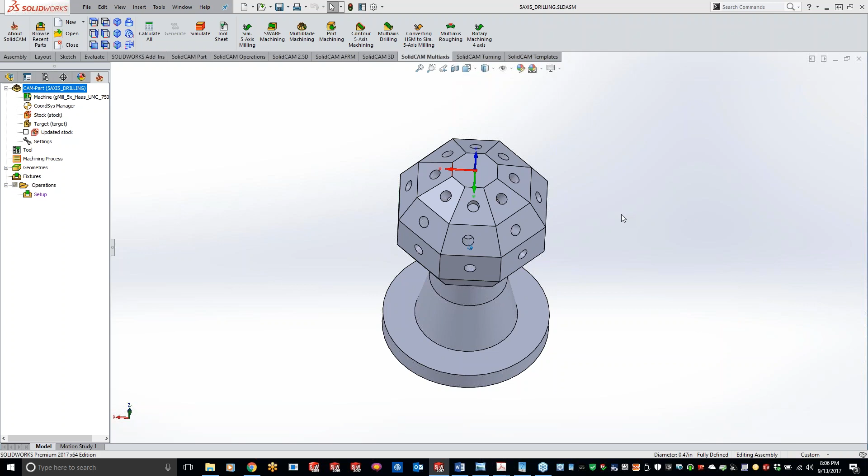Perfect, that kind of answers my question. I was curious about that, but the 5-axis drilling is going to make things very easy to use, since we don't have to create a coordinate system on each one of these hole planes. Especially when we get into our next part, some of these holes are at angles, and there's a compound angle on top of that. But it's very easy to use.

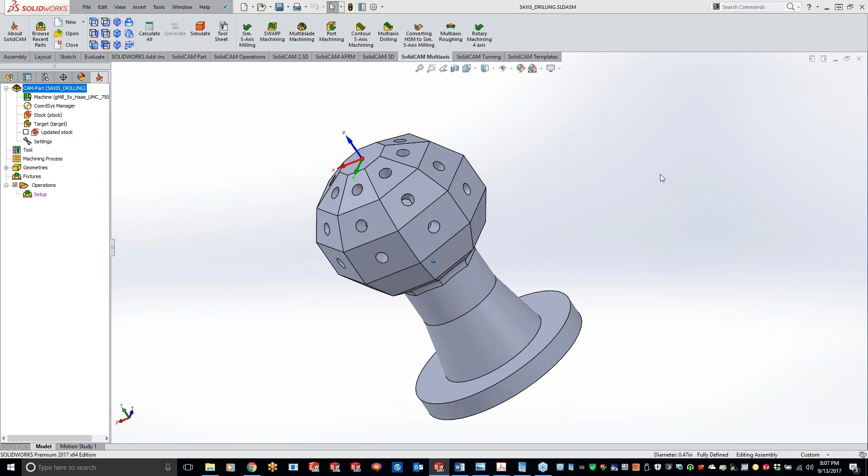So we've got this little sphere part here, holes all the way around it. What we're going to do is just our regular multi-axis drilling. We only have one option up here, and it's set up just like what I've been going through with the simultaneous 5-axis, just a little bit different on the drill geometry.

So we have a couple different ways of grabbing your drill geometry. We can easily pick a hole and click find holes, and it's going to find all my holes that are that size. If I get rid of this, I can use a filter, and let's say I just want a specific diameter hole. I can hit the check box for hole diameter, highlight the from or the to, and just click on the outside perimeter, and it will auto-populate those numbers for us. So a real nice feature there.

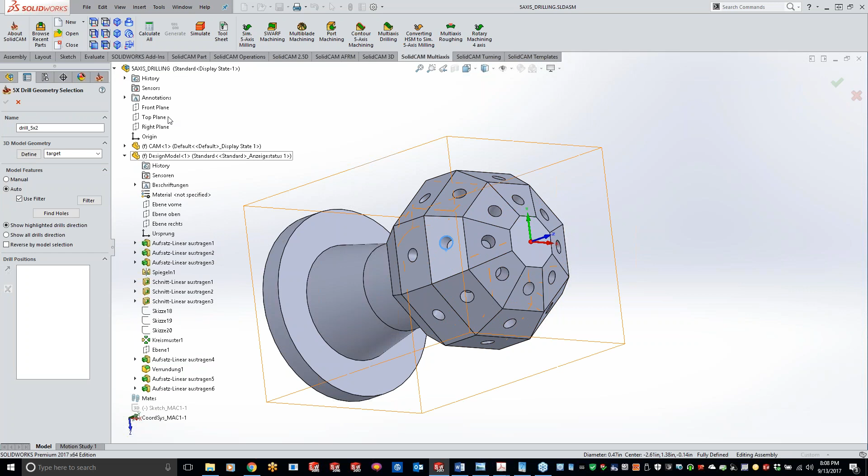And then we can filter out hole height. If you guys have your holes in different colors, we can do that too. A lot of cool stuff in here if we just want to do blind holes or through holes, filtering out stuff if you've got a lot of different size hole parts. Another way of going about it is you can grab from your feature tree also. So a lot of different ways of grabbing your holes, completely up to how you guys want to do it, but I'm just going to click find holes.

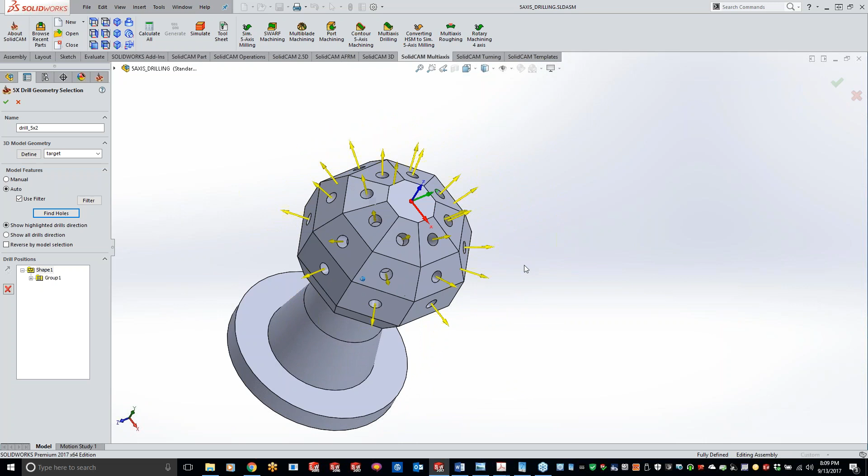Now, one thing with the 5-axis is you want to make sure your arrows are pointing out. This will indicate which way the 5-axis head needs to be rotated to achieve that hole direction. So you'll see I have all my arrows pointing out. Looks good, simple as that, grabbing the geometry.

Next up, grab our tool. So we can come in here and just grab my drill bit. It's really easy, just like drilling. Levels, where do you want your safety and retract levels? I'm just going to leave this as default right here.

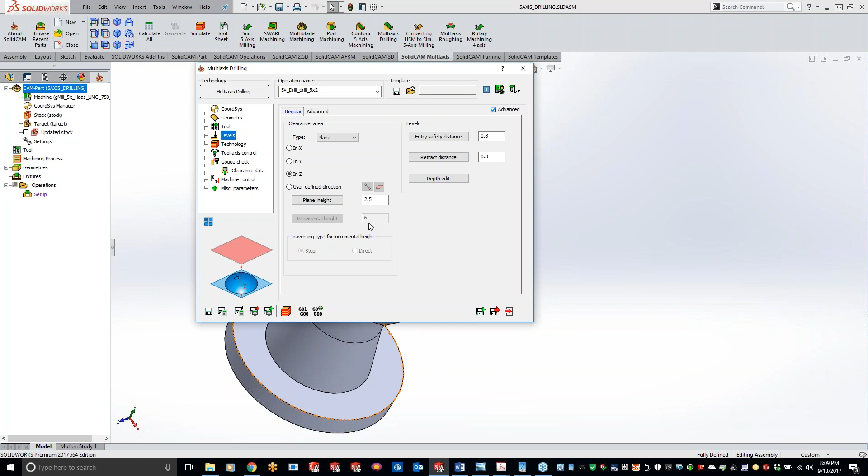Now if I want to come in here and change up my depth, you'll see everything's kind of grayed out. Don't get discouraged by that. All you have to do is hit the plus button, and then everything comes alive for us. So maybe if we want to do a spot drill, we could put our whole drill depth at 0 and do our diameter value. If we're cutting, I think it was a 4, I can't remember what size hole. If we wanted to do a .5-inch, so we have a little bit of chamfer on there, we could put that value in there.

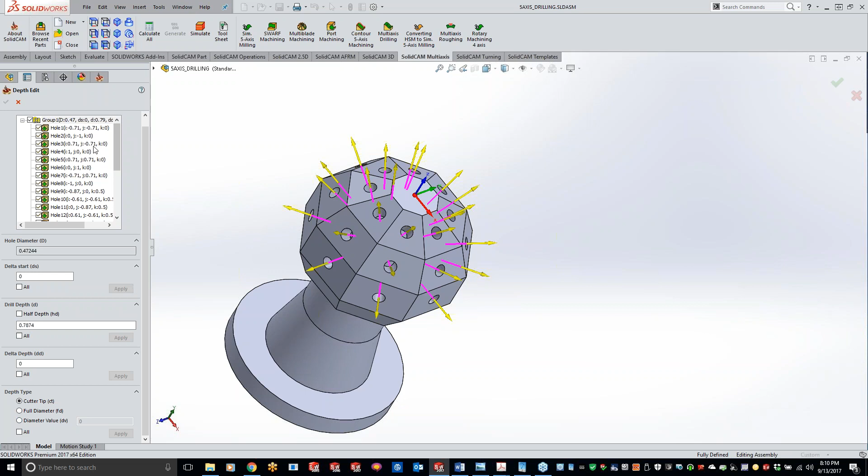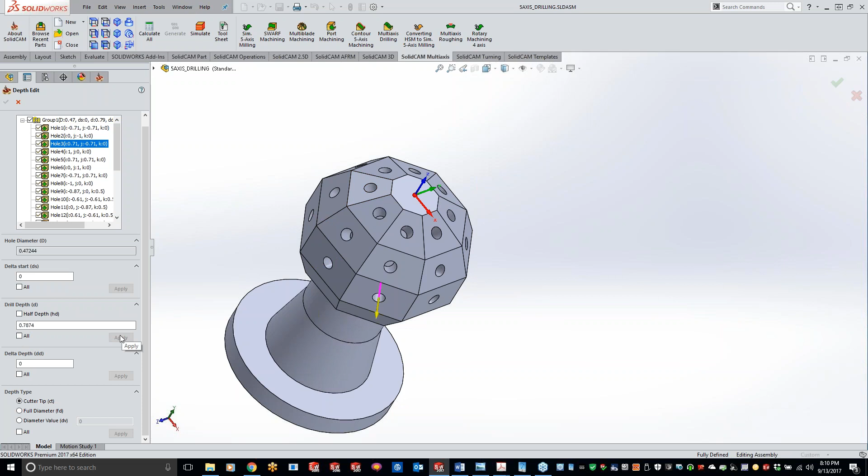Now you can sort these out so each hole is its own. So if I wanted to do maybe this one a little bit deeper depth, I can do that. But what it's pulling these numbers from is the actual model itself, so you really shouldn't have to do a lot of messing around here. But if there is that scenario where you need to go a little bit deeper or shallower, you can do individual holes, or we can put that number, hit the check box for all, then apply, and it will apply that depth to all the holes in this group.

So, the technology section is how do you want to drill out your hole? Do you want to do a G81, G82, G83? You guys can use this for tapping and peck tapping. Also, if you want to bore out a hole.

But for this particular one, we can just do a G83, and we can just do a step down of, let's do 0.5 here, and we can do a Q peck.

Now, one thing sometimes gets a little confusing, and I can't remember if I talked about this when we went over the drilling, but your step down right here, it all depends on your post processor. Some posts are set up so you can just put the step down value in here, and it's going to automatically add that to your Q peck. Your step down value right here is just for simulation only, I guess you could say. But in some cases, it will affect your post too. So it just depends on how they built your post.

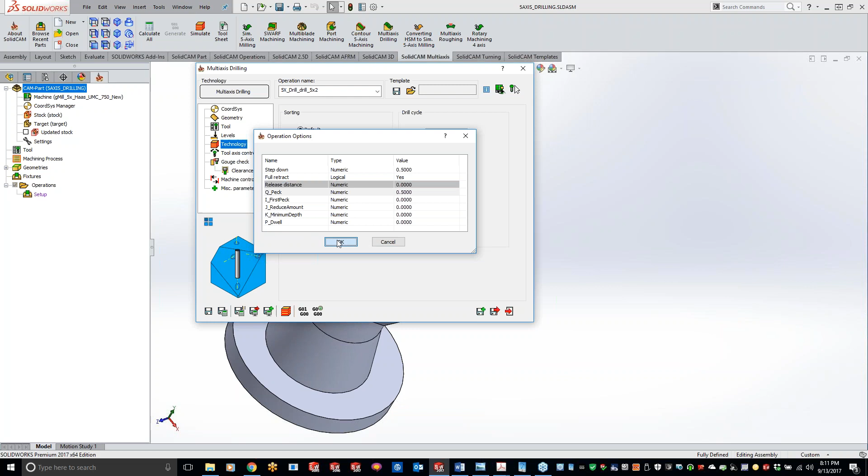So we'll just do a 0.5 for our Q peck here. And just like our regular drilling that we've covered before, you can do a first peck, reduce amount, dwells, and all that good stuff here. But that is it. Very simple, easy to use.

Right here you have your sorting, just like in drilling. So you can sort it out however you want. We're kind of starting on the side and working our way around, getting all those bottom holes going all the way around, and then we kind of move up and keep doing a spiral pattern.

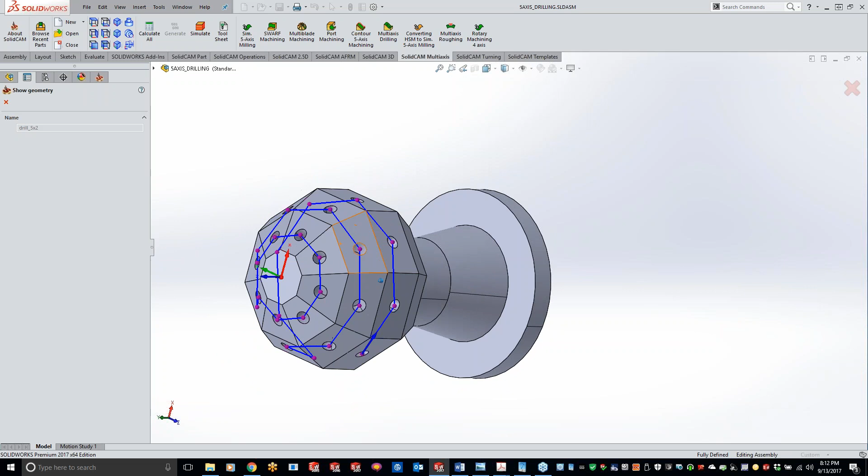Now, if you guys wanted to change that up, we can do a shortest distance. We could even do it advanced and hit the little button right here, and we can change up our pattern however you guys want. I know we've kind of covered a lot of this already in the drilling, but a little bit of a review for you guys.

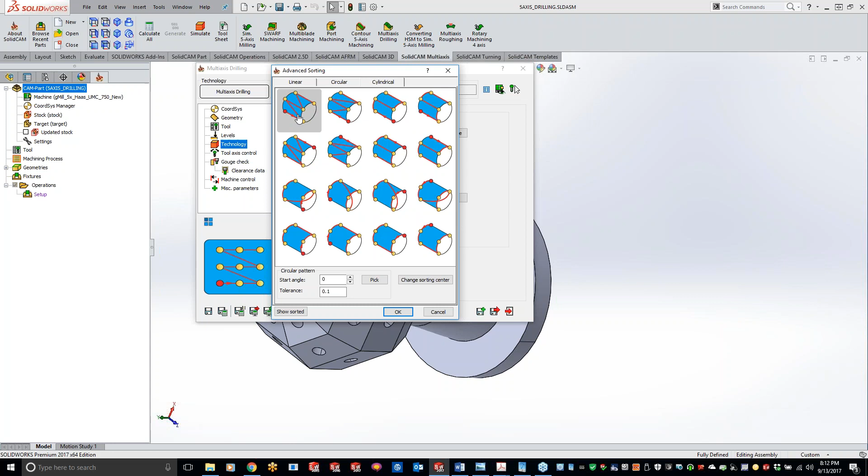So definitely a lot of different options here. You can do cylindrical here and go up and down instead of going sideways. Couple cool options there for you guys.

Tool axis control, pretty easy. Do you want a 4-axis output or 5-axis output? For this one, we're definitely going to need 5-axis just because of the way the head's rotating around with these angles here. So not a lot going on right here.

For those of you guys that don't have a 5-axis and want to make your life a lot easier programming drilling holes for the 4th axis and don't want to put those coordinate systems on there, definitely just come down to your 4-axis and call her good.

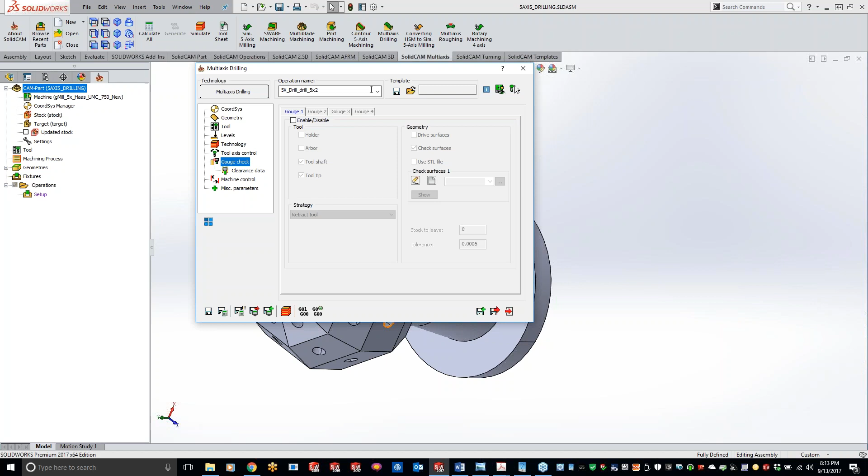And then gouge check. If we want to do a gouge check, basically against a holder is kind of what we're going for there. We're really not going to have to worry about gouging because it's automatically pulling in the depth of the holes for us. It already tells us the diameter of the holes, so not a lot we really have to worry about with gouge checking, but that option is here for you guys also.

And then you got your clearance of your holder, and then machine controls like what we've had through pretty much every operation that we've gone through for you guys. So that being said, let's do save and calculate.

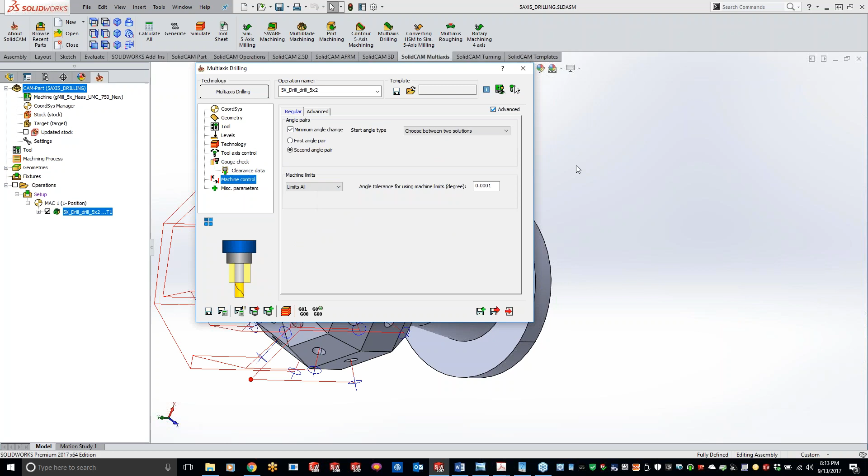And we have all our drill holes coming in here. So like I said, this is real simple, easy to use. If we want, let's go ahead and simulate this through. Do a solid verify first.

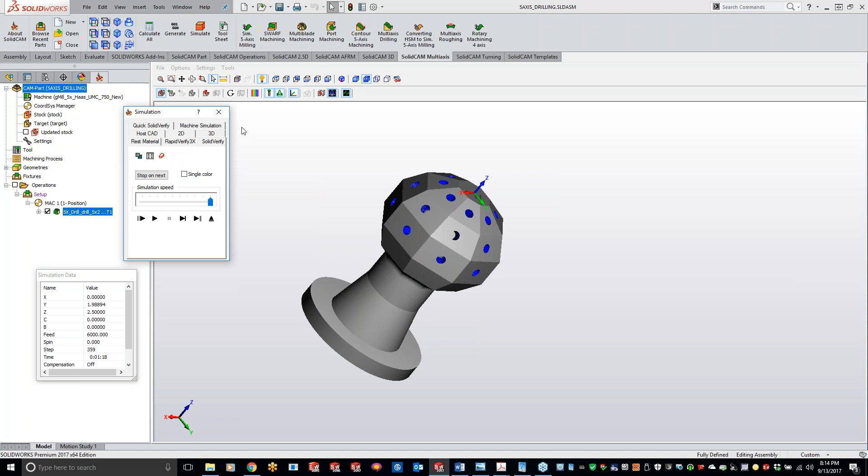Like I said, just going around and grabbing all those holes. It knows all the angles automatically for the hole location. So we don't have to worry about different angles. It all figures that out automatically for you guys.

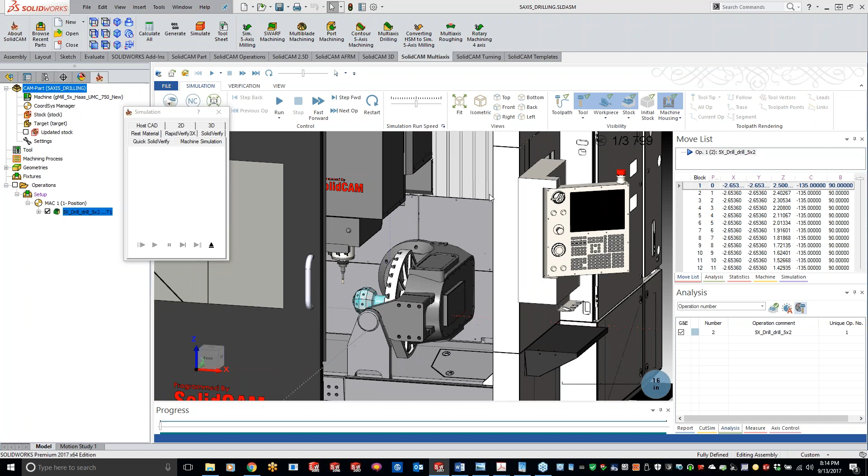If we throw this on the machine sim here, get this loaded up, get rid of our tool path. And I guess we want to see what it looks like with the shroud on, kind of with the machine shroud there. And we'll get that out of the way so we can kind of see what's going on here. Slow it down a little bit.

Doing our peck, just rotating around, working on the bottom. And then we'll see it kick up after this. I think it's this hole. Yep, right there.

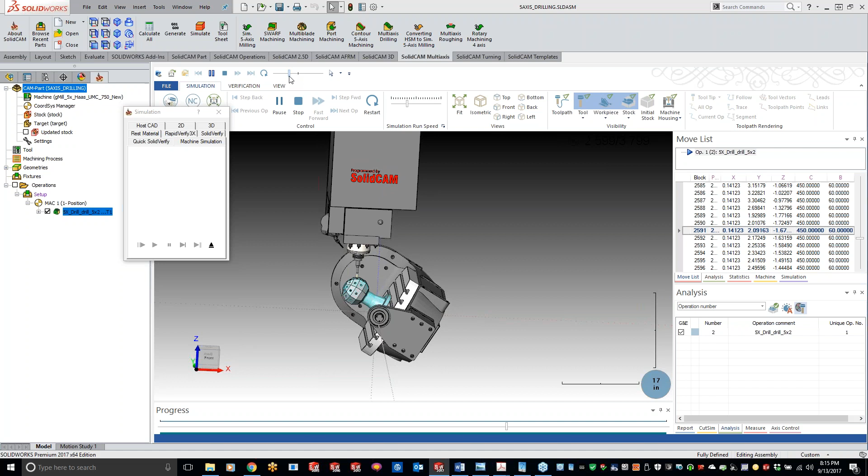And it takes out all the guesswork for you guys, so it makes it real nice and easy for doing any drilling on an oddball area, I guess you would say, if you guys are just doing a single hole or multiple different holes.

Speed it up a little bit here. There we go. So we have a finished off part there. Any questions, guys, on this part?

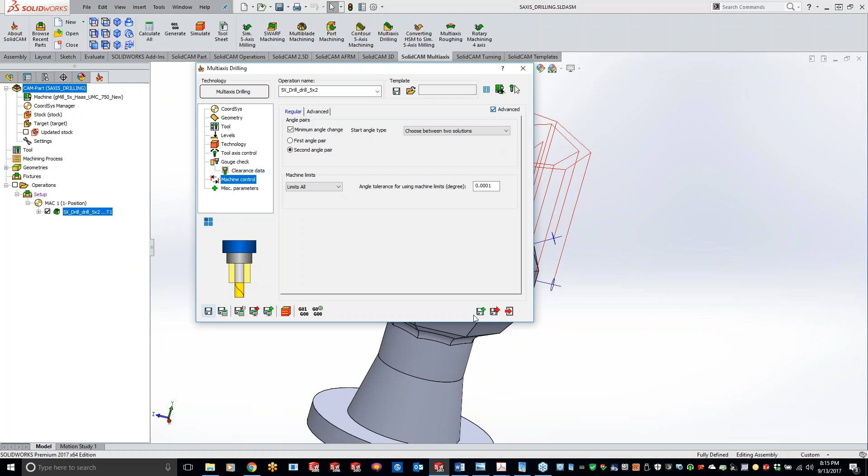The 5-axis drilling here. Tonight's class will be a little short just because the 5-axis drilling is so simple and easy, but let's go to our next part here.

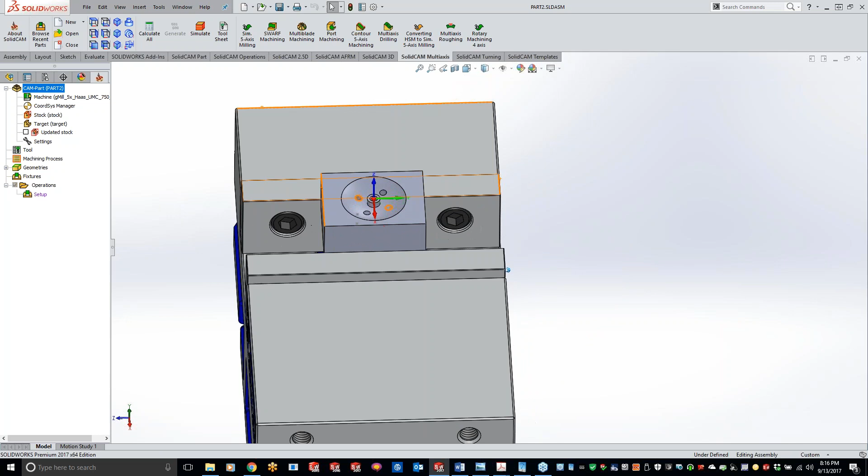So here's looks like a pretty simple part here, but if we actually kind of get down in there, like this hole right here, you can see it's kind of coming in at a very odd angle. Same thing with this hole right here, this hole right here. They're all kind of coming in at these goofy, funky angles.

So like I said before, instead of kind of coming in here, setting up your coordinate system to be aligned with that hole and trying to figure out where to probe it and all that good stuff, we'll let the software do all the hard work for us.

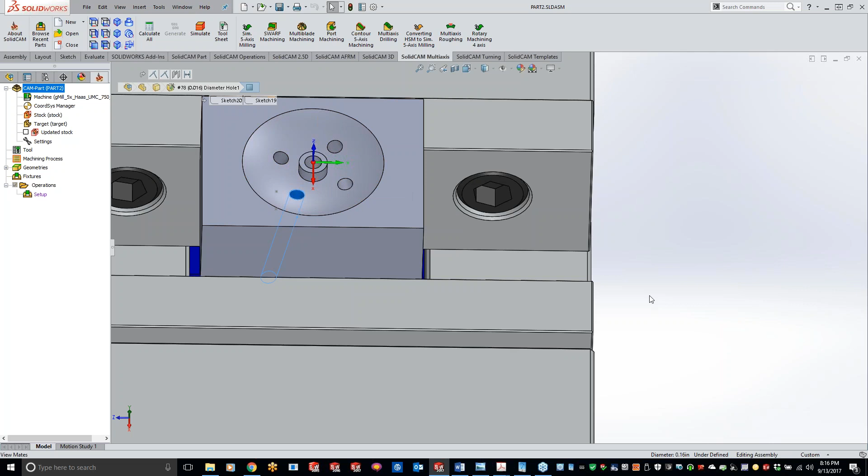I just noticed I have my coordinate system flipped all around here. My X should be going the other way, but that's all right. So once again, we can do our multi-axis drilling.

Go to geometry, and we'll just kind of zoom in on one hole, click find holes. I grabbed all of them. I don't want to do that center hole right there, so I can come over here and just remove that one from my group.

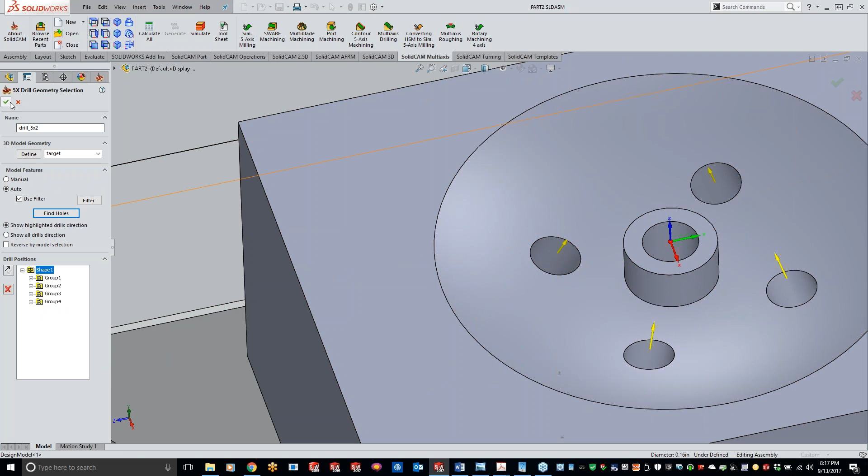So it's easy enough to swap them around. Go ahead and grab my drill bit here. And our levels. And we'll just kind of leave everything and see what we get here.

Technology, let's do another peck drilling here. And we'll just do 100th thou peck. And for correct G code, let's do 100th thou right there. Hit OK. Tool axis control, don't have to worry about it. Gouge check, don't have to worry about it. Save and calculate.

So now it's saying my clearance is too narrow. So let me get over to my levels. And let's just set this at 0.25.

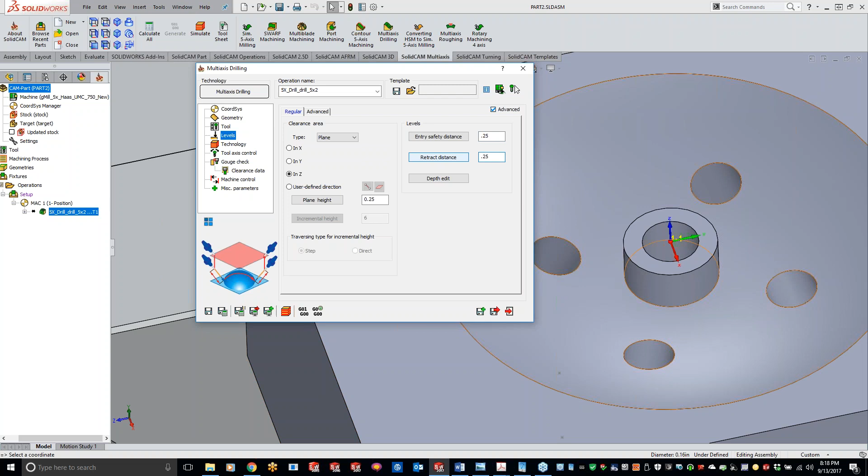All right, I got to, let's see, maybe let's move these all at 0.25 here. There we go. So I'm not sure why it was saying too narrow, because I put a smaller number in there. Instead of 800 thou, I put 250 thou in there. And that kind of was telling me that I couldn't get my angle that it was trying to achieve with that distance I put in there for some reason.

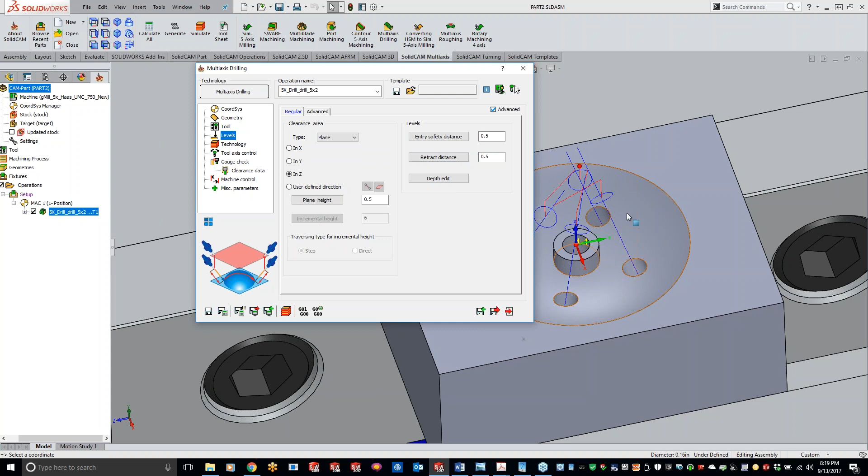So maybe, just out of curiosity, if we had this at 0.5, change that to 0.5. Maybe these numbers all have to be the same for everything to jive for the head to get rotated around here. This kind of rotated here, but yeah, that looks, everything looks good there.

I'm not sure why I got that error there for a second, but once again, if we needed to, we can come in here and modify our drill depth or go down to a certain diameter. But like I said, default is going to be down to the tip, going through that part for us.

And cover technology. Already saved and calculated. So let's go and do a SolidVerify here.

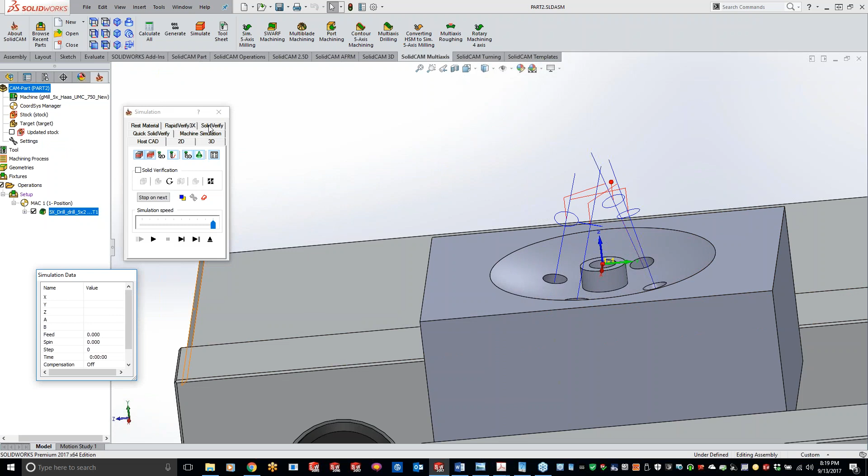So we're doing a little bit of air cutting right there. So what we can do is definitely shorten up that clearance and retreat distance, so we're not cutting any air there. So you can see our first about 3 pecks aren't hitting what's going on there.

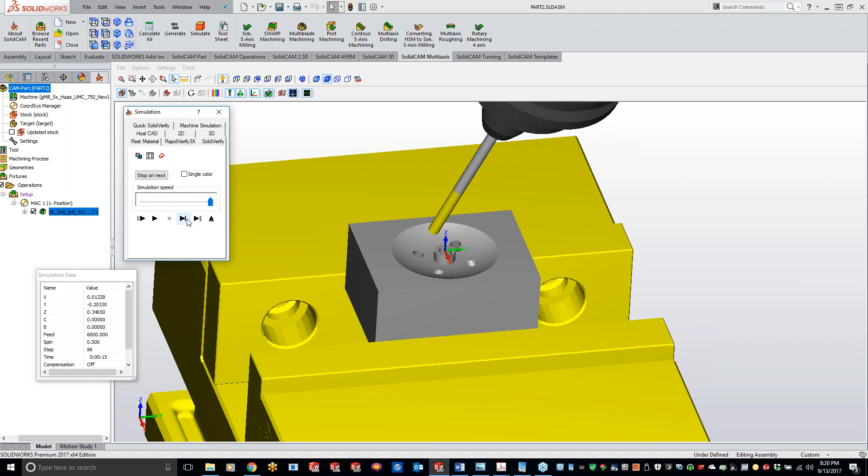So let's just kind of clean that up a little bit. Let's just put that back at 0.25, 0.25, 0.25 here. Bring everything down a little bit.

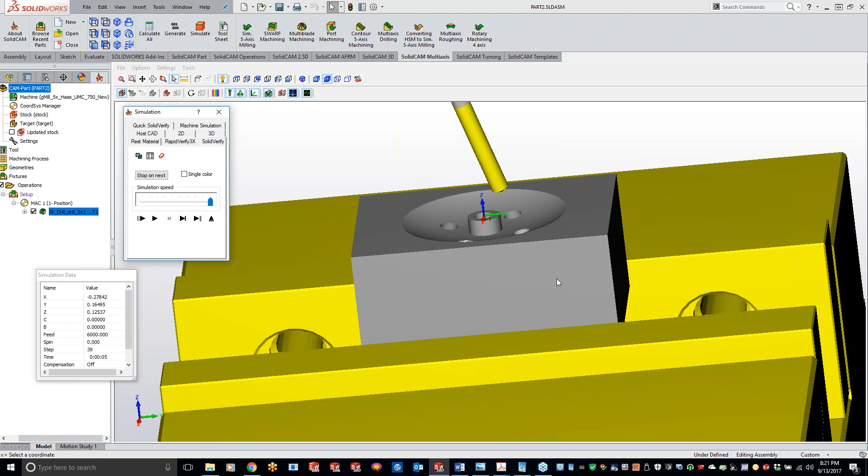Still doing a little bit of air cutting, but I don't dare bring that down too much further, just because when it goes to rotate the head around, I don't want that. It's already going to be a pinched butt cheek when that head's rotating around that close to that part there. So I'll savor the 2 extra air cuts there.

Let's see what she looks like in Machine Sim here.

And I know everybody on the meeting can testify to those little moments when you're on the machine.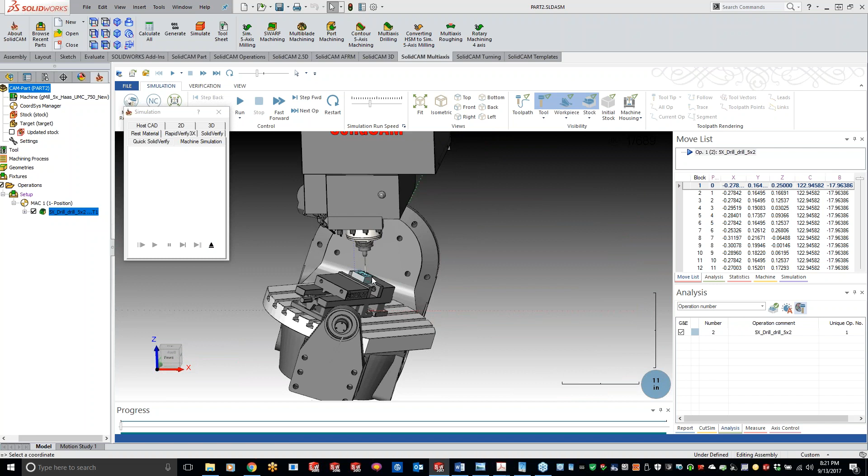All right, so you can see that we're kicked over on their side, and then we're also kicked over this way to get that angle in there. So if we just play this through here, rotating around, and voila, we got our holes.

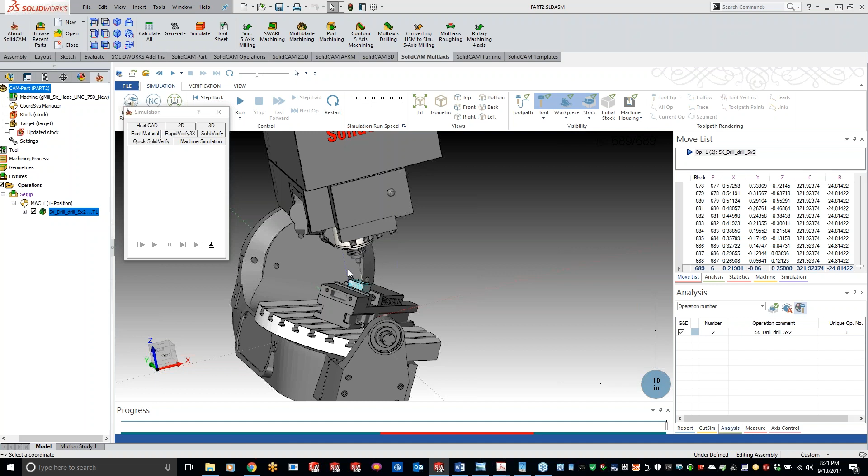Like I said, pretty simple, easy to use. Other than that retreat distance being, maybe a rule of thumb is try to keep these distances all the same for you guys. I'm not sure why, but I can definitely look into that. But other than that, like I said, it's basically drilling.

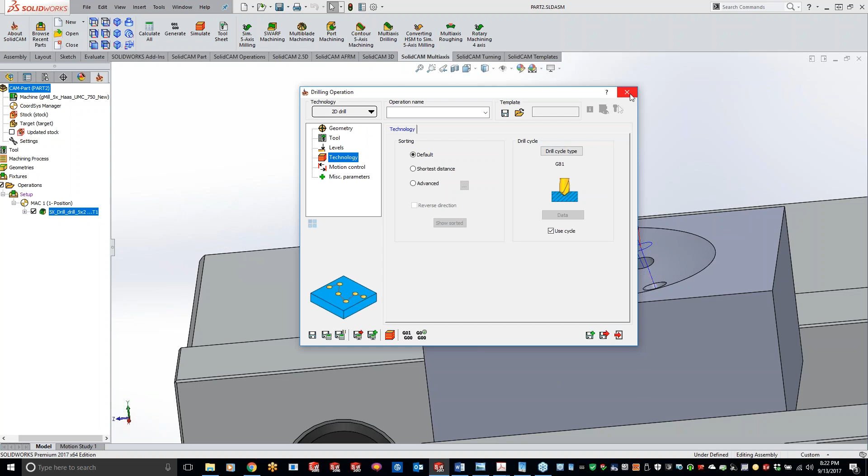If you were to come over here and just do a standard drilling operation, basically the same thing. You got your geometry, tools. Our levels look a little bit different, but pretty much the same thing. Still got your safety and clearance. Technology is going to look identical. The only thing that's different is when we get over to the tool axis control, if you want a 5-axis output or a 4-axis output.

And the other advantage is being able to do all the holes in multiple directions like that without having to set up all those coordinate systems. So yeah, you can do it all in 2D drilling, but with the swarf contour and drilling options enabled, you don't have to set up those coordinate systems. It's going to make your life a lot easier.

Just setting up the coordinate system isn't too bad for these compound angles. It's trying to get it to line up on your machine to probe that compound angle at that weird angle, finding your G54, I guess you'd say, or your G54.1 P1 - that's going to be the toughest part.

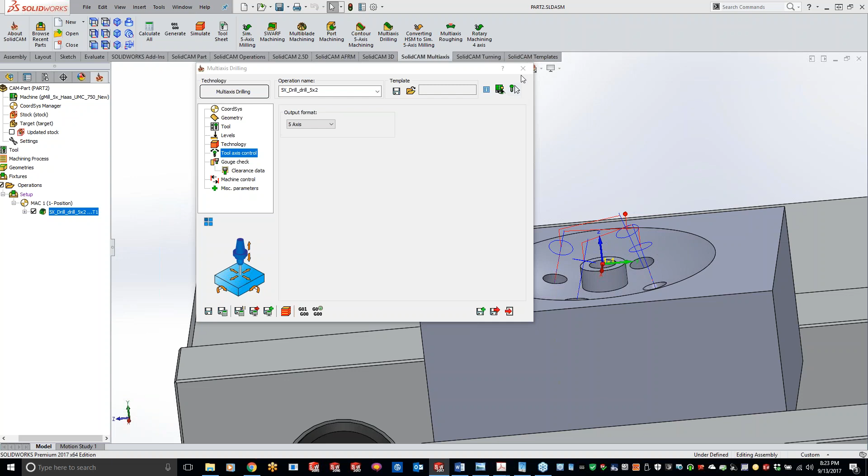Where we can now come in here, and if we want to, let me get this part rotated around here. If we want to come in here and do our - what am I looking for here - probe. And we can just do a Z point. That looks good for our Z plane. And just add a probe in there real quick.

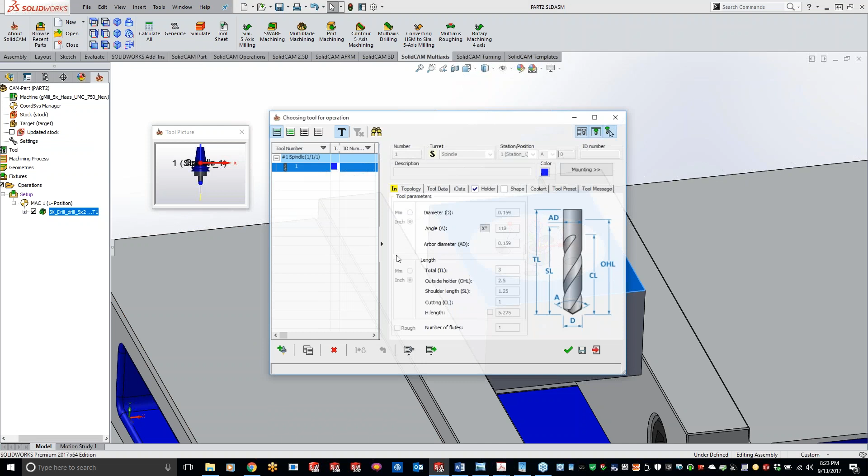All right, that looks good. Let's see. Clearances. All right. Oops. Here, I was just going to make this kind of off the cuff for you guys, but I must have my planes a little off.

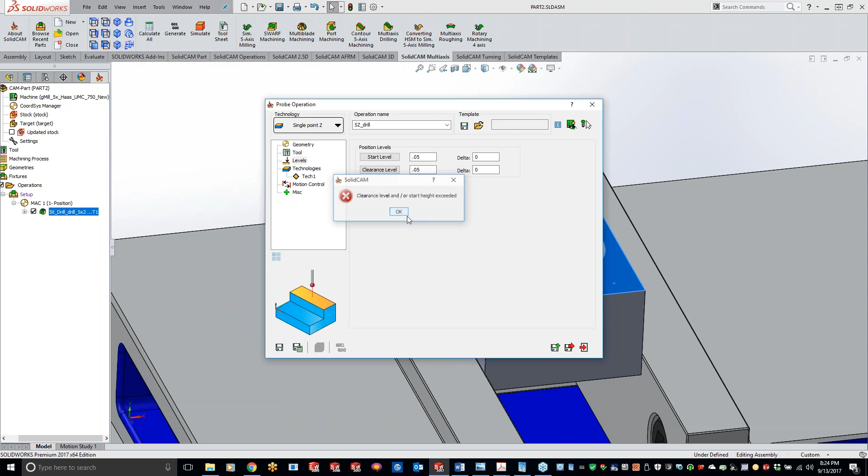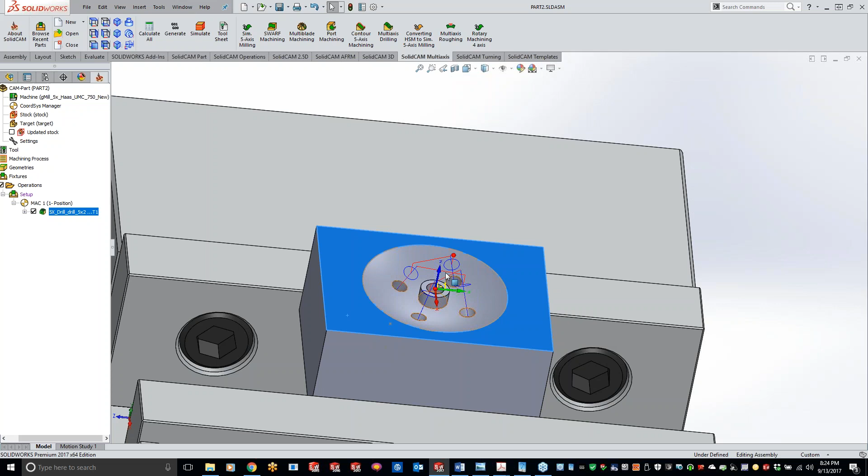Is it because of your coordinate system direction? No, I'm just doing a Z hit. Okay, well anyways, what I was getting at is just come in here, probe your part, do your Z hit, and go around your part, find the middle of your part there, or if this was coming off the lathe to do this dish out, we could just probe up that hub right there. So real easy to make your life easier on the machine.

Any questions, guys? I know this class is probably our shortest one yet, but there's just not a whole lot in the 5-axis drilling. They've made it pretty simplified, pretty easy to use with what they've done in there. So not a lot to show you guys here. Just definitely wanted to show you guys the features and how easy it is to use, without having to create those coordinate systems, like Tim was saying.

Looks like we got a quiet group here. Oh, here we got something. Yeah, thanks, Ronnie. Appreciate that. I don't know if the other people can see the question, but as Ronnie says, the class is complete. It is what it is. Yep, now awesome. Next week it's going to get...

It's probably going to be one of my favorite classes that we're going to be doing. Next week we are going to be doing what's new in SolidCAM 2017. There's a lot of great stuff that they've added in there, a lot of cool stuff. I'm really excited to show you guys. I'm hoping that we can get through it in an hour's time, but like I said, they've added a lot of cool stuff in there with the smart face and all that good stuff.

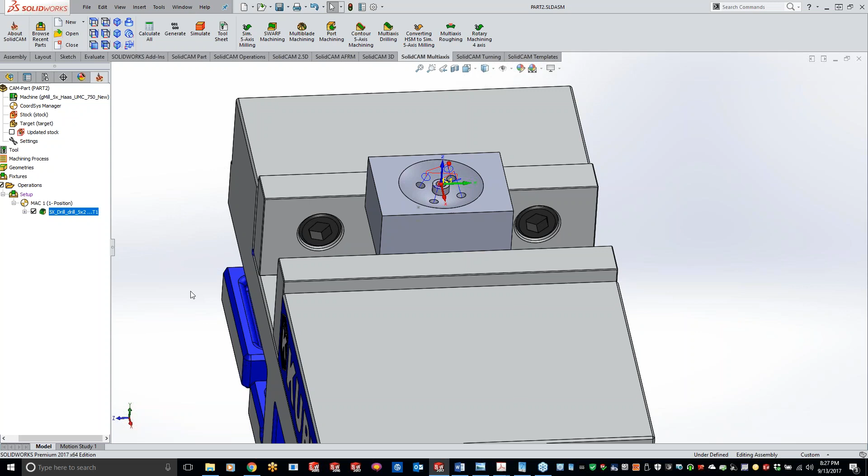I think quite a few of our customers have families that reserve Wednesday nights for family time, religious time, that type of thing. So what you've been doing here over the last year has been awesome, continuing it on, just having to change the date. I think this is a great thing.

Could you talk a little bit about the 2017 release and how things are coming along with that? It sounds to me like we're pushing that out to customers as they're requesting it. Is that right? Yep, absolutely.

Right now, when you go to the SolidCAM website, I do have a default login so I can show you guys what you'll see. If I can remember the password, hopefully it will be good. All right, so if you go to subscription and downloads, then SolidCAM add-on, you'll see only 16 is available right now. What we're doing is a soft release. It's not a beta. We are on SP1 Hotfix 2.

We're slowly rolling it out. How it kind of works is the Israeli team gets everything first, it goes through development phases, adding all the good bells and whistles. Like any software, you add one thing, it breaks 30 other things. So it gets through all that process, then it gets rolled out to Germany. Once Germany gives the stamp of approval, then we soft release it out to you guys.

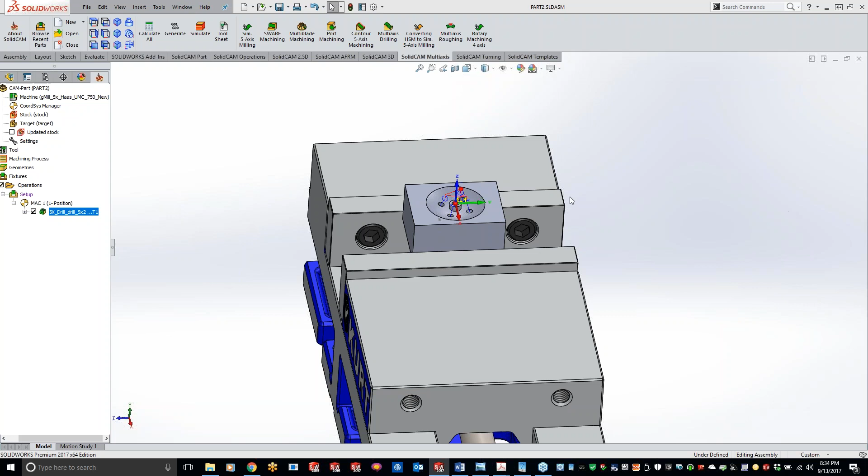Yeah, absolutely. And if you guys want, just as a little prep for you, give me 2 seconds here—what I can do is put the link for the What's New PDF document for you. Let me just get in there and log out of this user account.

The behind the scenes. Ooh, look at this—a sneak peek. All right, so here's the What's New. Secretive information, yeah I know. The copy link address—all right, I put the link for the PDF document for the What's New in 17 in the chat for you guys. So everybody should have access or should see that in there. As soon as I close out of the GoToMeeting, this will kind of all disappear for you.

So if you weren't able to get it in time, just shoot me an email and I'll get you fixed up, guys. So that'll give you a little teaser of what we're going to be covering next week.